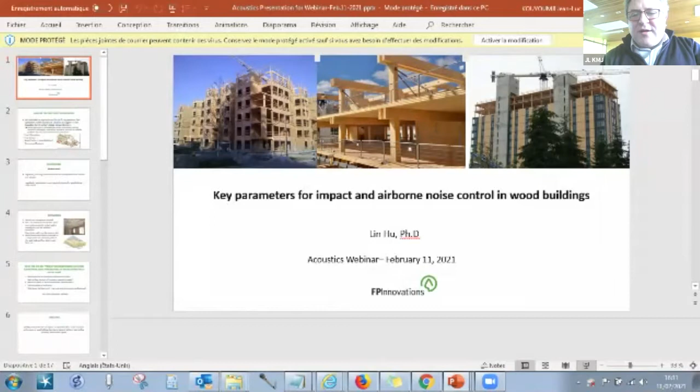Okay, there's a noise. The noise. Very much noise. Yeah, you can start, Lin. Jean-Luc, you can ask everyone to put their mic on mute just in case. Okay, okay, you can start, Lin. We can hear you, okay.

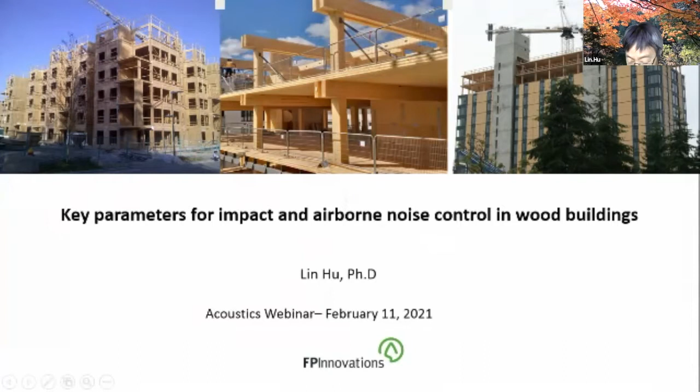Thank you, Jean-Luc, for the nice introduction. Hi everyone, I'm going to share some of our findings from a preliminary study on some key parameters, other than mass, of the insulation material and the components of wood wall and floor assembly, to control noise transmission in wood buildings. We found those parameters have often been ignored in producers' specifications, in our theoretical work modeling and our design. Sometimes people - designers and producers - call us asking what parameter properties we should produce, or what insulation material we should select to build better insulation, better components, or a better assembly.

So this is my purpose for this presentation. We'd like to call attention from the acoustic research community to pay attention to the fundamentals of wood construction noise control.

The fundamental is what I call the constitutive equation: how the material and component acoustic properties correlate to the wall and floor assembly's total sound insulation performance. So this is our focus.

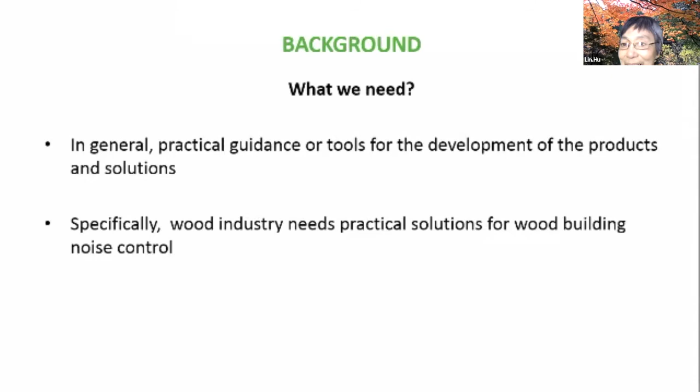However, we also found noise control for wood construction is a challenge, not so simple. So far, according to my knowledge, which may be limited, I found that the theory and equations that work for a homogeneous plate, like a concrete slab, don't really work for wood, because wood has a lightweight nature. We found mass law alone doesn't work.

Secondly, even mass timber, which is very close to a concrete slab, is not homogeneous. So those theories still don't work for the mass timber slab.

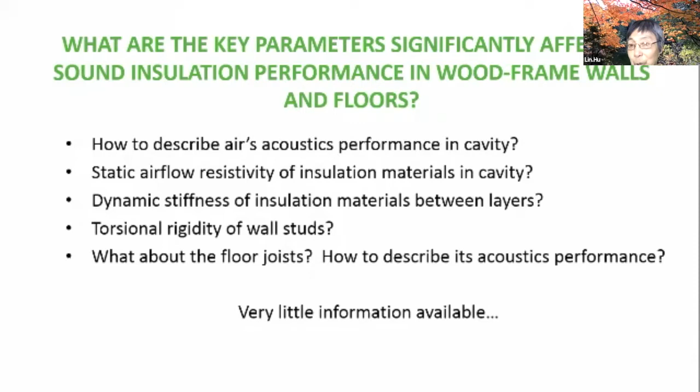For me, this is just one sentence I can find in the literature. No data, but it's so true. This is what we found: torsional rigidity, how the wall stud torsional rigidity affects the wall sound insulation performance. We understand the stud and joist play a role in the floor and the wall system. For me, it's just like a sound bridge, very similar to a thermal bridge.

Then we need to develop criteria. At what value of torsional rigidity is that bridge totally connected to the gypsum board, with no insulation function at all? All of these questions lead us to this study, but it's just the first step. We just started establishing our material laboratory. Our objective, I call it a preliminary study, is to identify the key parameters and how they affect the sound insulation performance of wood buildings, focusing on dynamic stiffness, static airflow resistivity, and torsional rigidity.

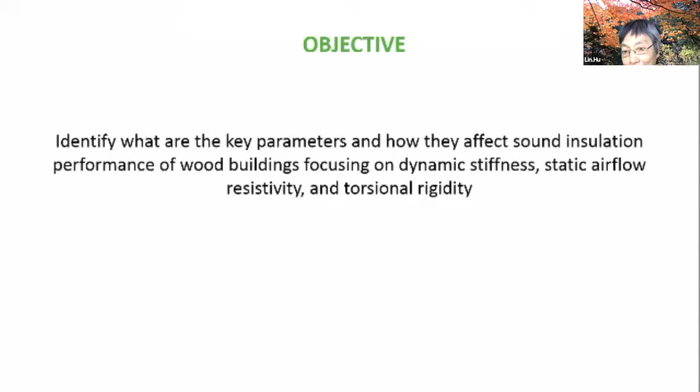This is simply to screen various combinations of flooring, finish, underlayment and topping, to see what role the dynamic stiffness plays, and it's very cheap and easy to do. It's not very accurate, but if we do everything in the same facility with the same approach, we can compare apples to apples. We call it the screening study. Okay, now let's move to the second one.

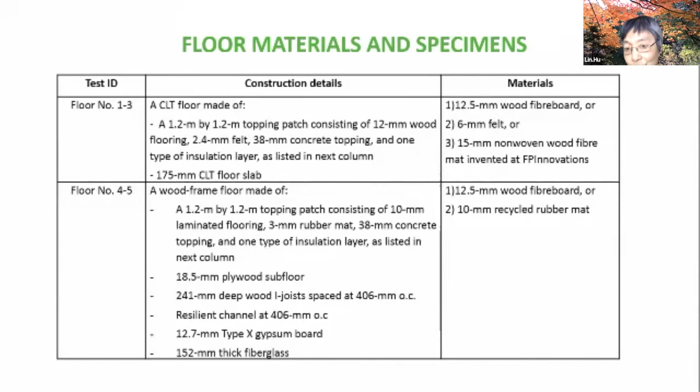So next one is, oh, sorry, too fast. Let's just go back one slide. Okay, now we built several walls. Here I also just show you two types of wall for two purposes.

The one is a box, very simple. Just the four edges, then on the top and the bottom just a very thin HDF plate. The purpose of this box: we just change all the filling inside, the sound absorption material in the cavity of the box. We try to see how the airflow resistivity affects this box's airborne sound insulation.

Actually we did more filling materials, absorption materials for the cavity, but I just show you these three significant ones. The one is fiberglass, everyone knows it's very common for every country. Then also rock wool. Then we also used wood fiber board, but maybe nobody really uses wood fiber board. Then you will see some interesting results.

Then we also have the real wall, wood frame, wood stud wall. So the wall group number 4 to 7, actually more than that, we did more than 10. However, for this wall, we only change the stud. We can't get all kinds of studs with various torsional rigidity in the market. So we asked our colleague to develop all kinds of wood-based stud. We call it the composite stud, with various torsional rigidity, to help us do the study.

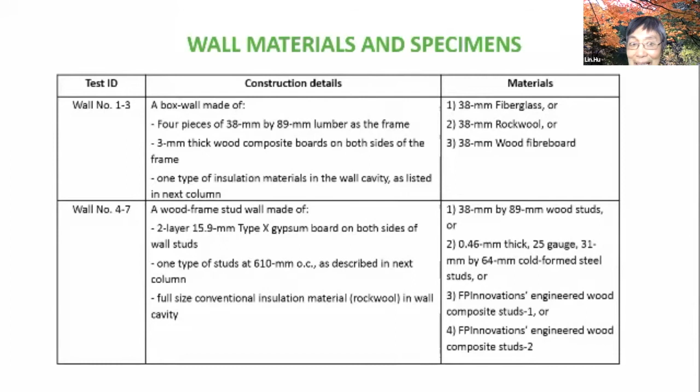So, okay, now very quick, now we just see the results. So the method, just a very conventional method. But we use ASTM, not ISO. But some ASTM are very similar to ISO. So let me quickly show you results. Okay, next, results.

Okay, the results, obviously for dynamic stiffness, because we measured not in the acoustic chamber, actually in the mock-up, so we measure the apparent impact insulation class, AIIC. So obviously you see the correlation. Once you have the lower dynamic stiffness, we got a very high AIIC. This trend applies to both mass timber floor and light frame floor.

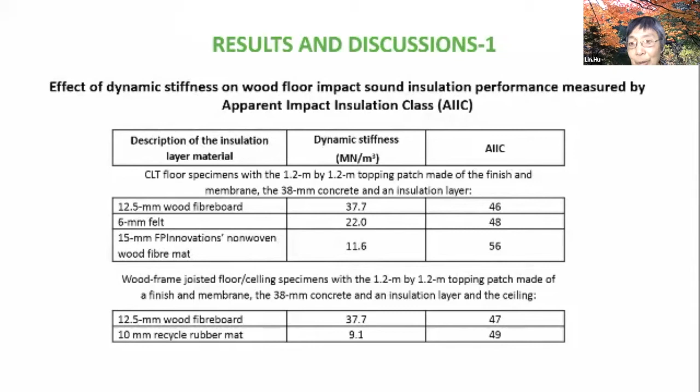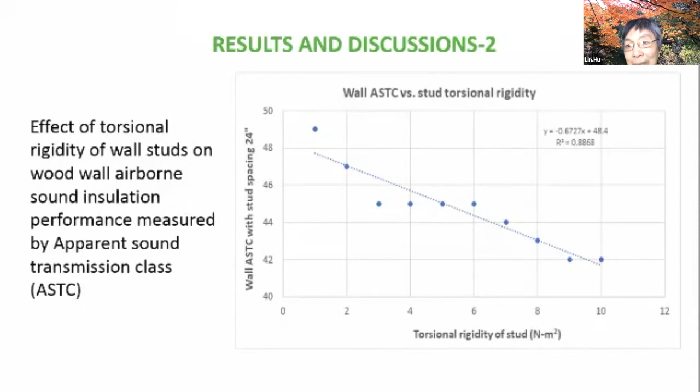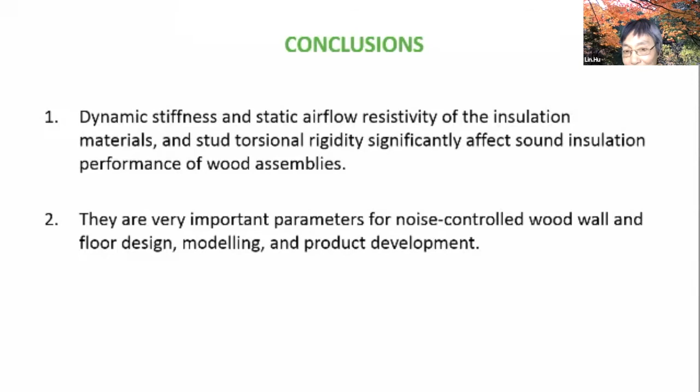Last one, I really thank the wood industry, the Canadian government, and our colleagues for supporting this study financially, mentally, technically. Okay, so last one, the next step.

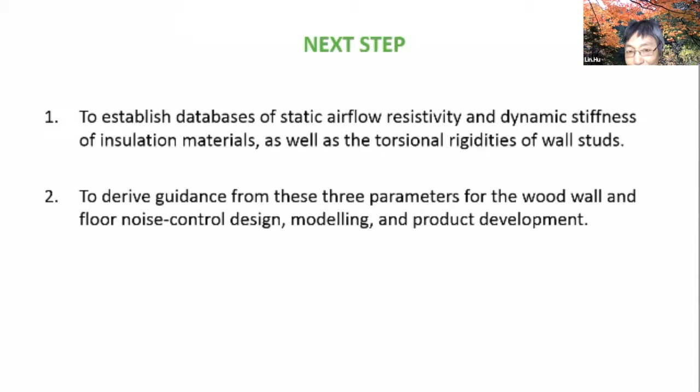Because we are just at the beginning. Then we try to establish our material laboratory with equipment to measure more torsional rigidity, and measure more dynamic stiffness, even the impact force. We are going to buy a force plate, we will buy an airflow resistance meter, we will measure more, we will try to see more correlation at this moment before we can get theoretical understanding. At least we try to establish some empirical correlation equation.

Okay, so the problem concerning the impact noise is that we need to improve the occupants' acoustic comfort for lightweight floors. And in the last housing certification by Qualitel, CERQUAL, we are imposing a new impact noise requirement, and the L'nT,w and L'nT,w plus CI 50-2500 has to be below 55 dB. Maybe I should add that for the French standard regulation, we only have a requirement on L'nT,w, and it has to be below 58 dB.

So the question was, how do we reach this performance, especially regarding the low frequency aspect with the adaptation terms dealing with the low frequency. So if we look at the performance of the floor, we decided to look for floors that had a performance between 50 to 52 dB in terms of Ln,w and Ln,w plus CI 50-2500. Oops.

And one of the potential solutions that we thought about was adding a weighting layer to the floors that we usually deal with. So in this presentation, we will have different types of wood floors. The first one would be a wood frame, I would say standard floor. The other one is today more common, it's a CLT floor. And then the last one, which is Jean-Luc's investigation, concerns a box type floor.

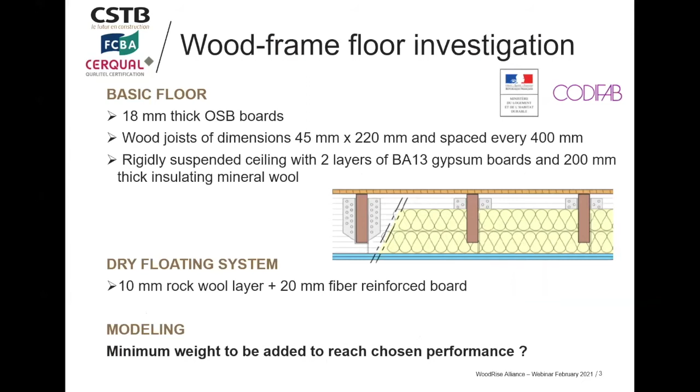Okay, we're trying to develop something which is all dry. No pouring concrete or anything like this in these solutions. So we decided to use a modeling approach to try to find the minimum weight we needed to add to this system in order to reach a chosen impact noise performance. So in this work, we used an optimization model, which is based on a genetic algorithm. Such algorithms are based on the notion of natural selection applied to a population of potential solutions to a given problem.

Hello, somebody's talking at the same time? Please. Thank you. Oops.

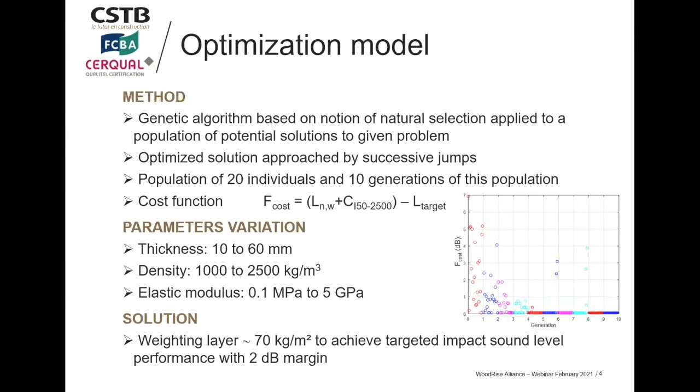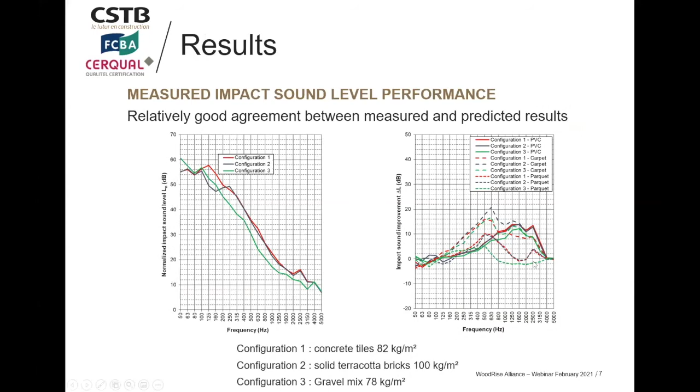On the right-hand side, you can see the impact sound improvement related to the different floor finishings that we put on the system. One has to be careful because the performance of these floor finishings is different as a function of the system we tested. So we cannot generalize the performance of the floor finishing. For example, the parquet on the floor configuration using the gravel mix is really low in the high frequency range. It's even below 0.

So next we'll go to the CLT floors investigation.

I don't know if Nicola is here and wants to take the lead on the talk, or if he wants me to keep going. No, just go ahead, Cathy. Okay.

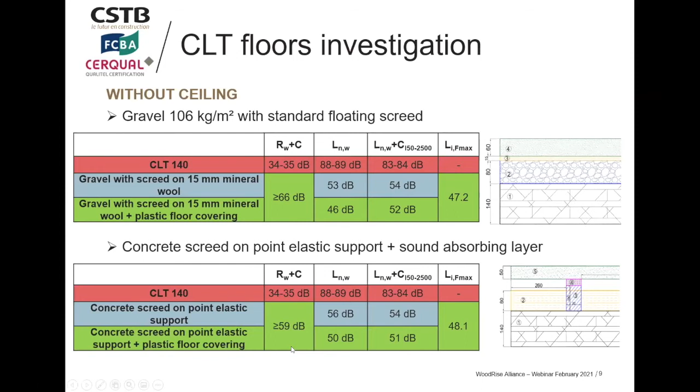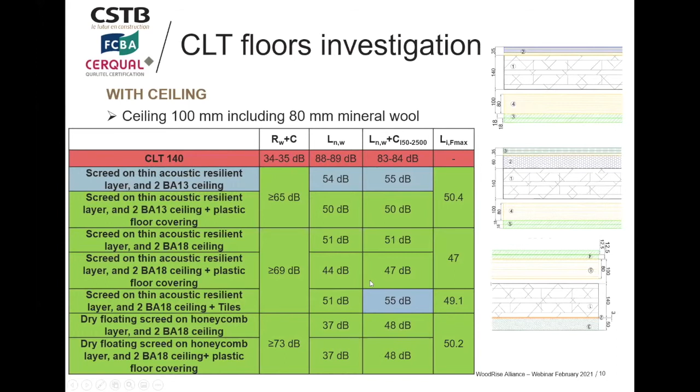So for the CLT floor investigation, we have a low frequency effect observed in relation with the floor finishing, or the floor covering. And we did not expect this because usually we try to find a solution without the floor covering, and we say the solution is fine for all floor coverings. So we have to be really careful with this floor finishing.

The plastic floor covering finishing implemented was associated with a low frequency improvement when we mounted it on the standard screed, and with a low frequency deterioration when it was mounted on the dry screed. Okay, for the tiles, we had a low frequency deterioration, and that's why we didn't meet the requirements when we used tiles on such floors.

Another remark regarding this investigation was that the weighting layer, when we used the gravel mix, did meet the requirements in terms of performance. However, when we used a mortar-based weighting layer, which is a bonded system, we didn't meet the requirements. So one has to think about this solution, and whether to use an unbonded granular material rather than a mortar-based screed for the weighting layer.

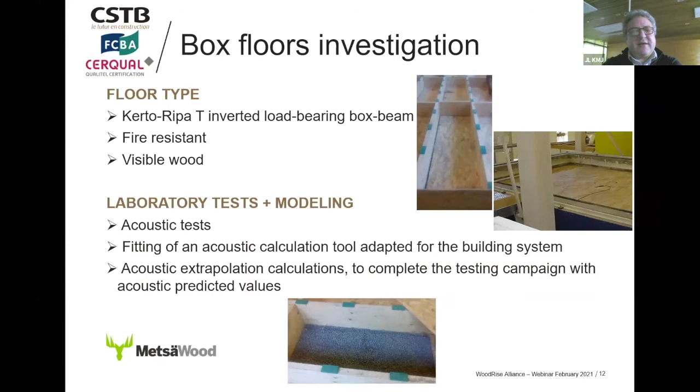So this is some results coming from tests we did with the same building system. Again, this development was done together with Metsä Wood, and the target of this company was to create a very high level performance floor with a big cavity using less wood. They are using LVL, and their market target is something like 8 to 12 meters of span, or 6 to 14. So we tested some different configurations, inspired more or less by the Belgian bunker floor.

Thank you, Belgian people. This was during the Woodrise Congress in 2017, where Bart Ingelaere presented some results, and Metsä Wood said, 'Oh, this is very interesting, why don't we also use this system?' Okay, so the building system is a...

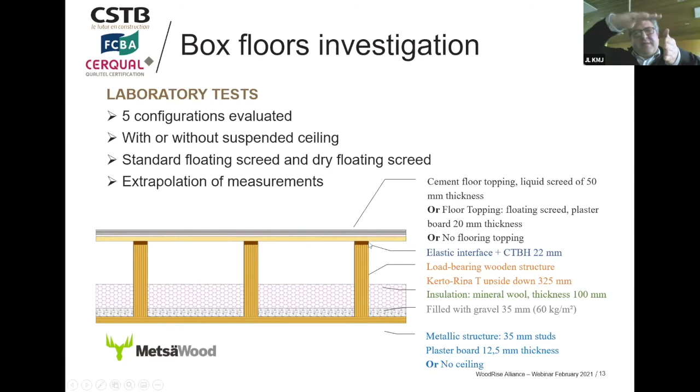...reversed floor, and the studs are on top, and inside the cavity it's filled with a little bit of gravel. On top of it you have insulation material, and then on the beams that are on top, you put a panel, and in between that panel and the beams you have to put some elastic layers. Very interesting system in that case. And on top of this, you can put a cement floor topping. So maybe we can go directly to the measurements.

A very interesting thing we identified, but this was not actually our purpose - the results were strange, so we said, 'Where is this coming from?' And then we noticed there was a screw inside the floor. The people, when they prepared the floor, just put a screw because they couldn't imagine that you cannot put a screw on top of a panel. The structural behavior of the floor is taken by the bottom part of the panel, the bottom top of the box, and actually the system is fire resistant also, so we don't need that screw.

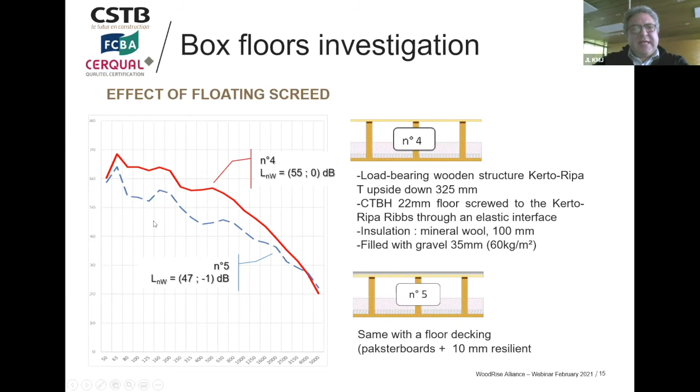But anyhow, it was there, and look how much we can gain from that result - it's something like 10 decibels. I see that we don't have the low frequency results for this, but never mind, we have it and can calculate it. When we put a lightweight floating screed on top of this floor, we are very good in low frequency behavior and also in impact noise.

If you can show the next slides - we made some measurements to create a model to calculate and derive calculated results from measured results. We are showing here the curve of this calculation. So when you add a ceiling on such a system, you also enhance the performance of the floor, but not that much. And if you use the cement screed, of course, you enhance the performance further. This has been done using calculation.

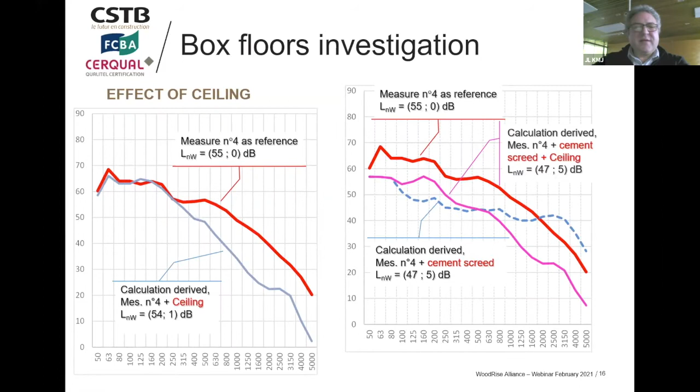Is there any conclusion on that work? Yeah, just a general conclusion - looking at different types of wood floors, we have different solutions targeted at performance that integrate the low frequency range with respect to impact noise. We used a mix of laboratory tests and modeling approaches, which allowed us to optimize and evaluate performance before testing in the laboratories. The weighting layer appears appropriate, but one has to be careful about the type of material used as weighting layer, especially as we've seen on the CLT floor. Care must also be taken regarding the floor finishing effect. That's all for today.

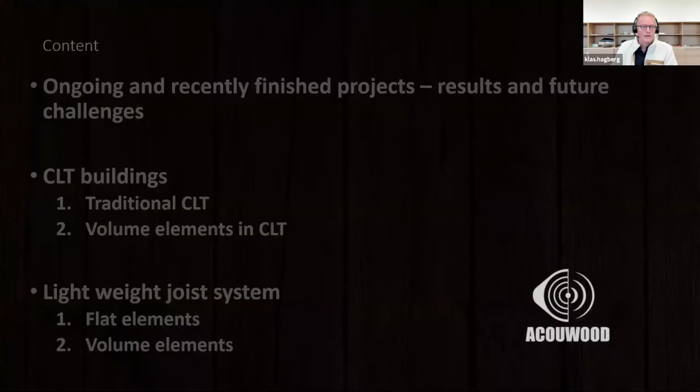The content of today: ongoing and recently finished projects, results and future challenges. I will go through some CLT buildings with what I call traditional CLT - maybe it's not really traditional, but it's more like plates that you put together. And at least in Sweden now, it started to be very hot with volume elements in CLT, prefabricated in factories. We also have lightweight joist systems, flat elements and volume elements. I will not talk too much about volume elements, but we are involved in some projects with volume elements with joist systems also - I have limited time, so I think I will stop there.

I think it was quite interesting to hear Lin Hu before, because with this problem of predicting sound insulation, I think we need to understand much more still to predict - we are a little bit working in the blind. So you have to be a little bit stupid to do this.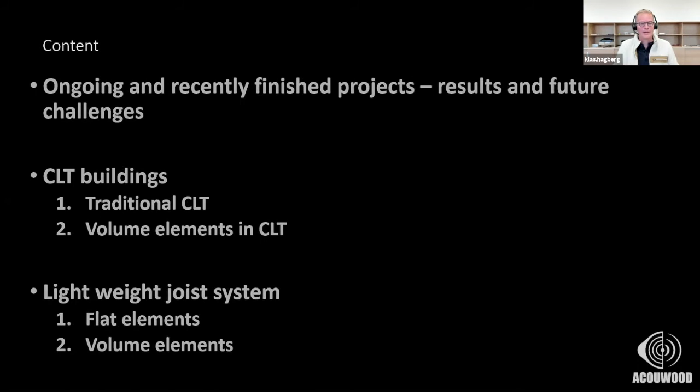This is a summary of the projects I will show you today.

This one is one of the biggest projects we have for the moment. I have been working with it for approximately 4 years. It's in the city center of Stockholm - 13 stories of wood in CLT, 4 buildings, approximately the same. It's called Cederhusen.

The second one is volume elements in CLT in Nyköping, close to Stockholm also. They're not all finished, but the main part of these are finished and already moved in, so we have seen how it's working in reality. I will come back to that.

This house is in Karlskrona, south of Sweden - it's a quite fancy place and very nice project. Then we have student dwellings in Örebro, some I-joist systems in Skellefteå in the north of Sweden, and an 8-story building in wood joist system in Enköping, a little bit east of Stockholm.

If I continue now, the first project I want to show you is this Cederhusen. The first house out of 4 is now built - they haven't moved in yet. We are doing regular controls in this building, and it's fully in CLT.

There is some concrete on top here, as you see on the floor structure. But all the stabilizing elements, the elevator shaft, and everything is in wood, CLT elements, nothing else. So it's quite a lot of potential flanking transmission paths and so on.

It was quite rough requirements to really keep a lot of - don't make it too thick, as they say - because we need to have enough space to rent out. You can always improve by adding layers on the side of the CLT panels and reduce the flanking transmission, for example.

But the final solution in this project was to have a concrete slab on top, or rather a CLT slab as a bearing element. They vary from 160 CLT up to 220, depending on the load and the span and so on. Then there is 30 millimeters of impact sound board, then we have 80 millimeters of concrete with floor heating, and then parquet on top.

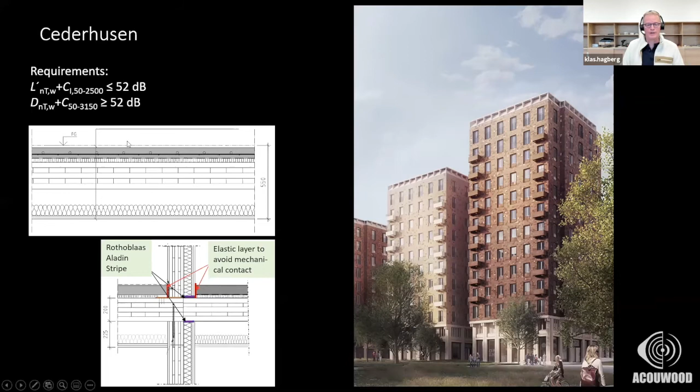And I will show you some initial results. This is from inside the building. At an early stage we told them they have to build a test room, which they did, not with the real concrete in this case, it was plates, 80 millimeter thick, on top of an impact board, and then floor covering. They made a ceiling in the floor below also. And we took the worst case scenario with 4 flanking walls in the room, not covered with any gypsum or anything yet, just to be sure we were on the safe side.

The results from this test measurement was impact sound 44 dB, super good, better than expected actually, better than predicted also. Airborne sound was more or less like predicted, 53 dB, a little bit better actually. I was thinking with this thin layer and with the wooden, visible wood, it would have been a little bit worse.

This here is the result from airborne sound. The different colors here, the red one is the measurement results, the gray one is predicted. We adapted the model after the measurements also to make sure we're on the right track, to be able to calculate more rooms and other configurations. This yellow one is the transmission calculated with only the floor structure. So almost, if this is true, almost everything is going through the floor structure.

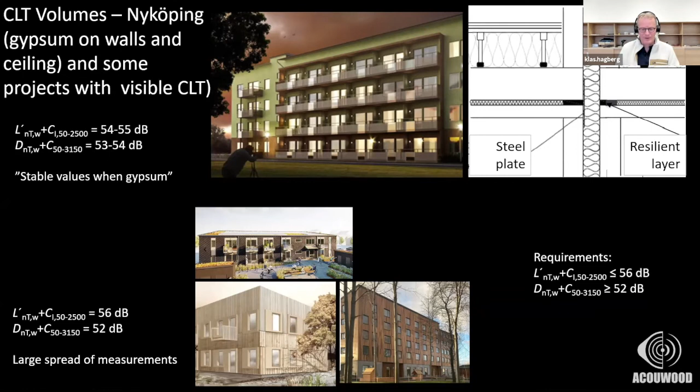And by using this, we didn't need any Sylodyn or Sylomer or whatever between the different stories, since we have this covering to reduce the flanking transmission in both ways. However, in the facade, there was not visible CLT because there was one gypsum mounted directly on the wall here. But still no other layer to reduce the sound emission from the walls.

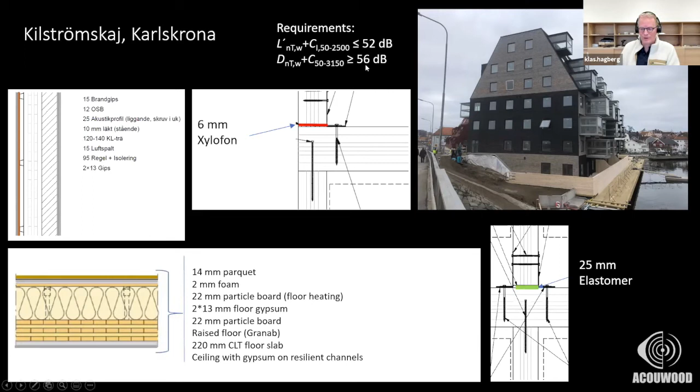Requirements were to fulfill sound class B, 52 dB for impact sound and 56 dB for airborne sound. And we did quite a lot of testing, and we managed, but there were a few exceptions here actually. For example, here 58 minus 7. It's a little bit too bad. It's not even BBR. But it was a very small room, and small rooms are tricky to fulfill, no matter if it's concrete or wood or whatever.

But the mean value in all measurements did fulfill 56 dB. And in Sweden, it's okay to have 56 dB if the deviation in single measurements is not bigger than 2 dB. And impact sound, sorry, we had a mean value of 52. It sounds almost like I'm lying because it's just spot on, but it's true. Yet again, we were spot on here.

And I'll show another example of a project, Sjöstadsorangeriet. It's exactly the same build-up. The only difference between Sjöstadsorangeriet and Kilströmskaj in Karlskrona is that we had a floating gypsum on top of the Granab floor, and we were thinking it would be the same, but the result was actually a little bit worse. We fulfilled BBR, the minimum requirements in Sweden, but not sound class B for impact sound. Airborne sound was no problem.

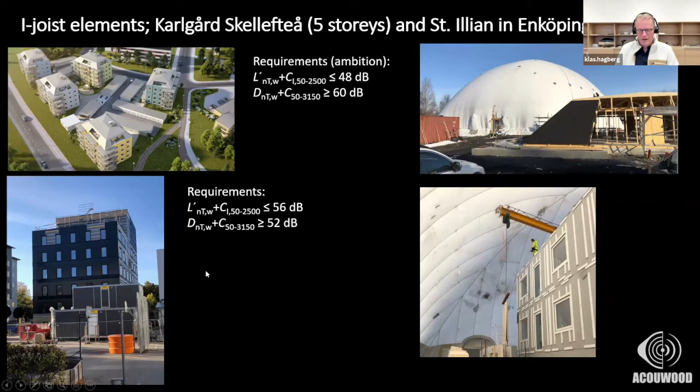And they actually fulfilled sound class A, 43 dB, with a very light structure for the floor. And the key here is to use... I'll just move my bar a little here again.

They're using I-joists here in the floor structure, and then there is a stiffener I-joist also in the other direction to make the floor much stiffer, and they are connected by a beam under. And then there is an LVL board here, glued and screwed together with the beams, to make it even stiffer. And then there is a floor heating board here, and then parquet on top, nothing else.

And to make it possible to transport these elements from the factory to the building site, they use a steel spring in the ceiling. When it's transported lying, it's just lying directly together. And when you lift it up, the spring starts and the ceiling falls down. And everything is prefabricated, even the installations, and everything is designed first in the 3D model. And they just plug it together on site.

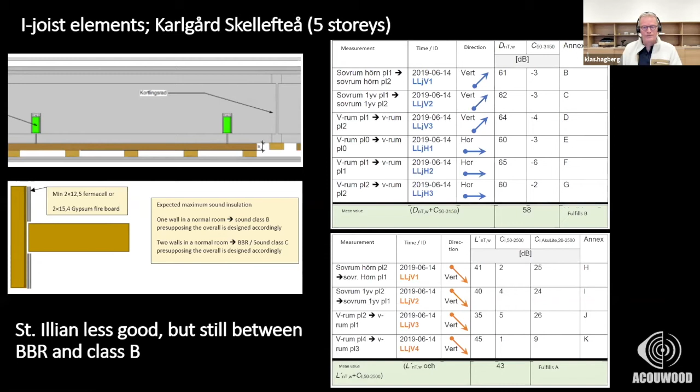Conclusions. I hope I am in time. First of all, I think elastomers and their effect on flanking transmission and stability need to be further evaluated. It's a very high cost in projects, and if you just gain 1 or 2 dB, maybe you can reduce the requirements instead a little bit. I don't say I know it's true, but we have to know more about this.

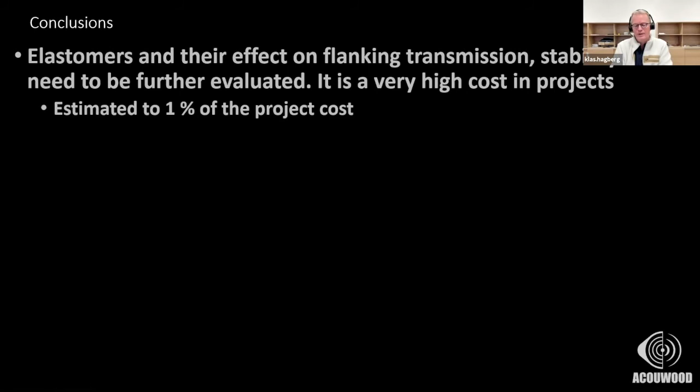And high cost: I had an estimate from the people working in Cederhusen. They said around 1% of the total project cost, and it doesn't sound much, but if it's a project cost of 200 million Swedish, which is 20 million euro, it's like 200,000 euro just for the elastomer to put it in place. So if we can do something about that, I think they will be super happy.

CLT volumes with visible wood are tricky to predict. It's really not easy, I would say. And the higher the building, the worse it becomes. We're working on three eight-story buildings with CLT modules now, so it will be interesting to see how we can connect these different modules to make it feel good.

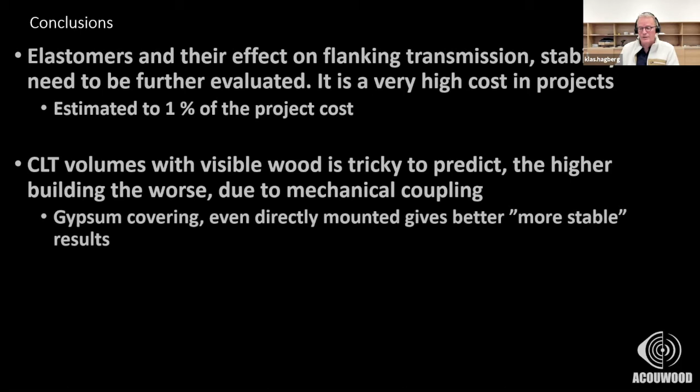Gypsum covering, even if directly mounted, gives better and more stable results. You don't get as much spread in the results as if you have visible CLT. And I would say it's possible to achieve very high sound insulation with I-joists. And it's also a good system to really reduce the amount of wood, or rather you use the wood in a better way, because it's a more efficient way to use wood. You reduce the amount of wood, which could be good if you really want to build a lot.

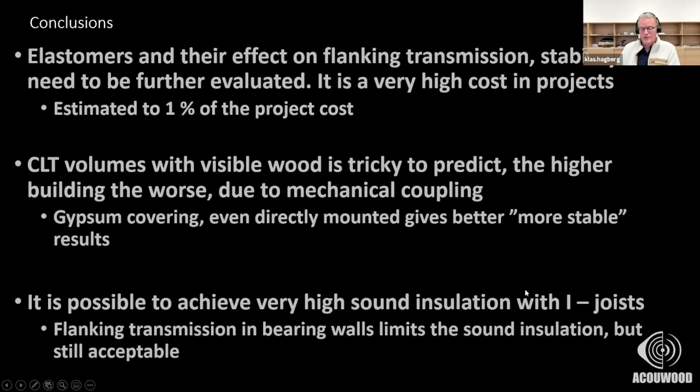And flanking transmission in bearing walls limits the sound insulation, but it's still acceptable. So I don't think it's a big problem. And I think that was what I wanted to say. Thank you.

Thank you very much, Klas. Yes, you were ahead of time. I mean, you are five minutes late, but it's okay. Yeah, you accept it. Yeah, it's okay. Okay.

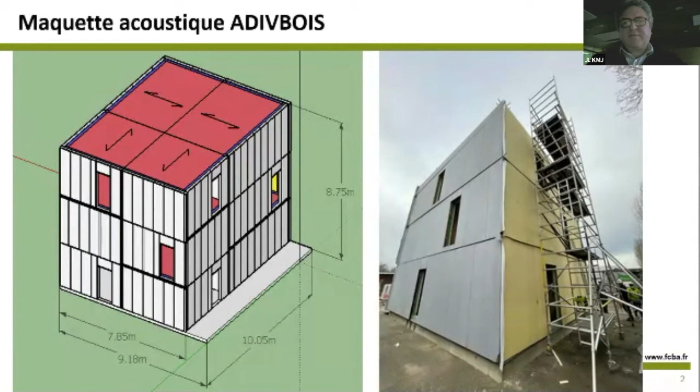Okay, so this is the mock-up, or the maquette. This mock-up is made of 3 floors of CLT and also walls made of CLT, and all surrounded with stud walls, say, framed walls, facade. So here you have the picture of how it was last week.

So we started this in November 2020, and it started, of course, with concrete. The soil here is very weak, so we had to make some pillars, and we built up a very simple concrete structure. On top of it, we prepared our maquette, our build-up. Here you can see the first part of the building where you can see the horizontal cross junction that we're going to analyze, of course. And here we are.

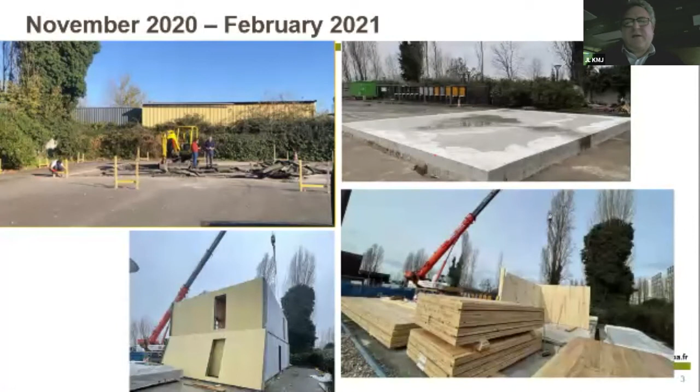It goes very quick, actually. Once the wood started being implemented, it only took something like 7 days. So this was very quick, and here you can see some pictures from last week. You can see sun in the window here, but it's false information, huh? Because while we were implementing this building, it was raining all the time. So that's why the wood has really been in contact with water, and why we now need to wait a little bit.

Yeah, we can see that in Sweden you are using tents, but this is not at all something usual in France. So we are not using tents, as you can see.

So our building, our maquette, I will say it in French because it's the name we gave it, is going to be used for flanking transmission measurements on junctions. And of course, our junctions vary across different parts of the structure. So we are going to make the flanking transmission measurement on the naked structure. That means that only CLT is going to be measured here.

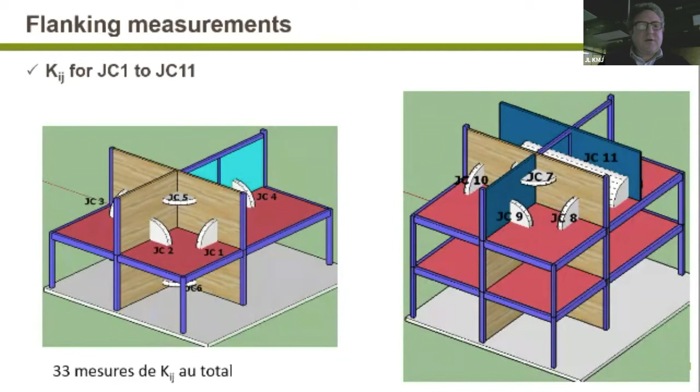Bare CLT connected with other parts of CLT, and also bare CLT connected with plasterboard walls, and facade. Also, we are going to make some facade. It was also the occasion to go a little deeper into our knowledge. That's why we also changed the plan of experiment a little, and we added some things to identify.

And here we are going to identify the point connection. So what we asked the designer is to leave us a system with the capacity of changing the point connection. So here where you see the dotted lines, we are going to change the connection between the floor and the structure.

Okay, so we are going to start with actually no screws, then a screw every 500 millimeters, and then screws as it should be, every 250 millimeters. So 3 steps of point connection, and this is to identify the performance for 2 things. One is point connection knowledge, point connection modeling, and also the point connection together with resilient layers.

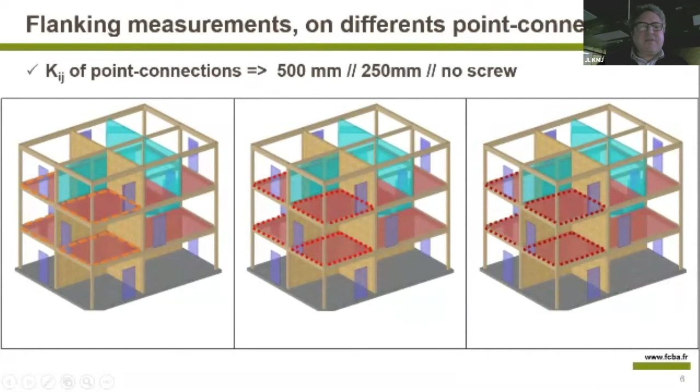Here you can see the resilient layer. But first, let's talk about the envelope. The envelope is a facade. The facade is not a structural bearing system. It's only a facade that is hung on the structure. The structure is the blue lines here. It's the poles and beams that are making the structure holding the construction.

And of course, the CLT in the cross here, cross in the first floor, half cross here, and only one panel on the last level. So the building system, I was saying that it is different from one part to the other of the construction. First floor is with resilient layer. Here you can see them. It's the red line. Okay, and on the second floor, it's the same building system without this resilient layer. So this will help us to better understand what is the influence of this material, of course.

And then here we have on the edges, you can see the structure holding the floor. It's a pole and beam structure, and the facade that is only making the box all around it. Of course, it's going to be doubled with plasterboards, and this is going to be done in the near future. It's going to start in two weeks. So today the structure is completely finished, and it is ready to follow up, but we cannot close it because it was a little too humid.

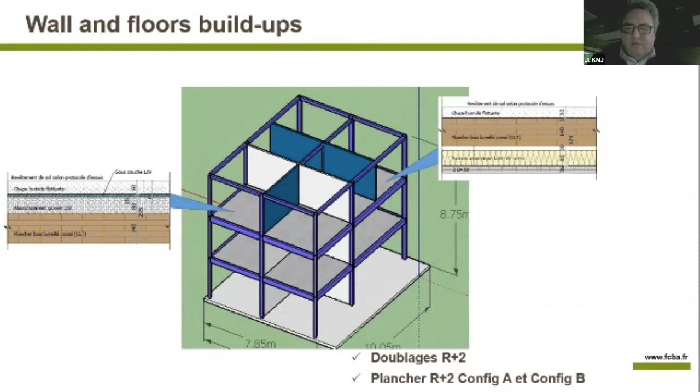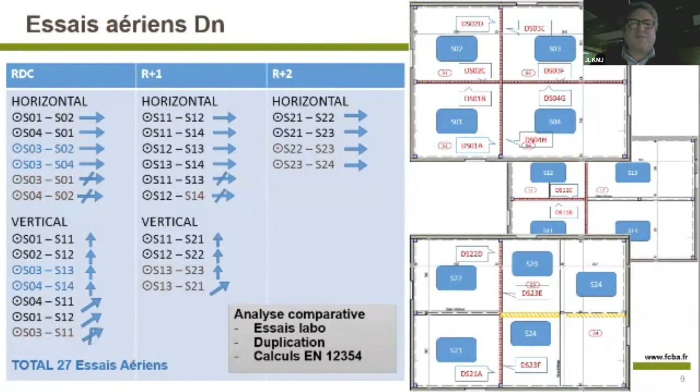And so one part is with insulation from the top, and the other part is a more usual building system with CLT floor, 140 mm, with a floating cement screed on top of it, and a suspended ceiling underneath with 180 millimeter gap. So after we build up everything, we're going to make a huge quantity of testing. After flanking transmission, we're going to make all possible tests in all directions for airborne noise, from one room to the other, from top to bottom, and also diagonal, of course. And this we are going to do for airborne and also impact noise.

And after we make this first investigation on the building system that we believe is going to work on this structure, we are going to change the build-ups. So we are going to work on walls with visible wood and make all kinds of permutations inside the building system. Altogether, we're going to perform something like 40 tests for impact, more than 50 maybe, and for junctions, we're going to measure something like 16 kinds of junction in Kij. So it's a laboratory for testing and measuring the Kij and also validating the complete system. It's an in situ measurement laboratory that is controlled. So it's a laboratory, but in situ.

Okay, so to have an idea of what we're measuring, just look a little bit at how much time I still have. Not much.

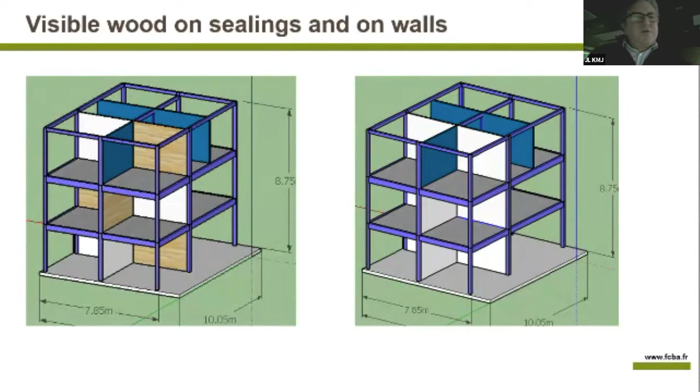So I'm going to run through a study that I prepared together with Woodrise. This was a few years ago. We worked together with people from Tecnalia on that. So we measured some flanking transmission. We don't have much information about flanking transmission with CLT, and this is part of what I have, and I am of course very interested if anybody can help in sharing the information they have on flanking transmission. So we did some flanking transmission. This was five years ago. It was presented at Internoise in 2018, I think, yes.

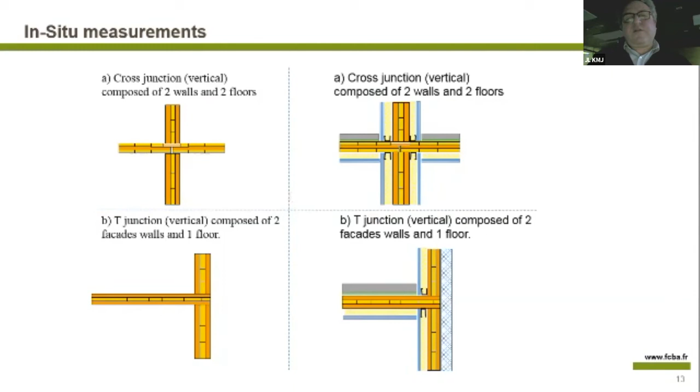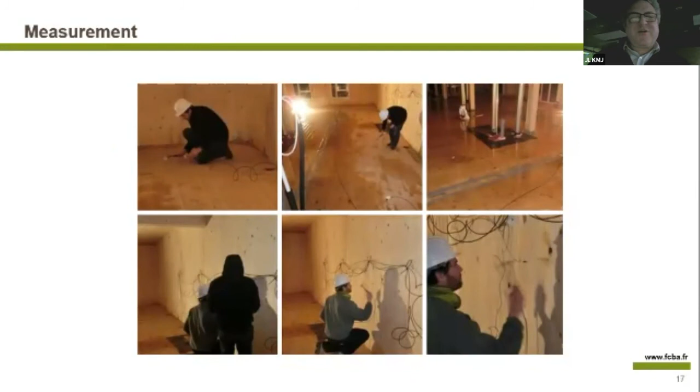And so we worked on different measurements, and we worked on in situ measurement. In situ, you have to do everything in one night, actually, because during the day the people are working on the site, and they will not wait for you to make some measurements. So we worked on bare CLT, and also on facade and cross junction with doubling, with all the structure and even the plasterboard. So this is how it looks, and this is how we measure. See, again, a lot of water.

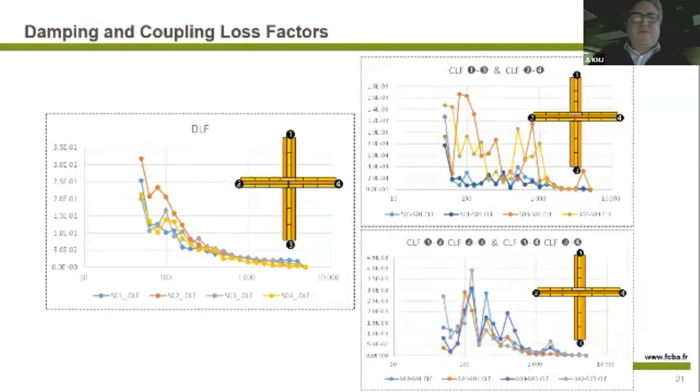This is exploitation of measurements. It's a lot of measurement, of course, and exploitation. And here are some measurements of coupling and damping. And this is physical measurement that we can use to calculate the Kij, that is the facteur de réduction vibratoire, vibration reduction factor, something like that.

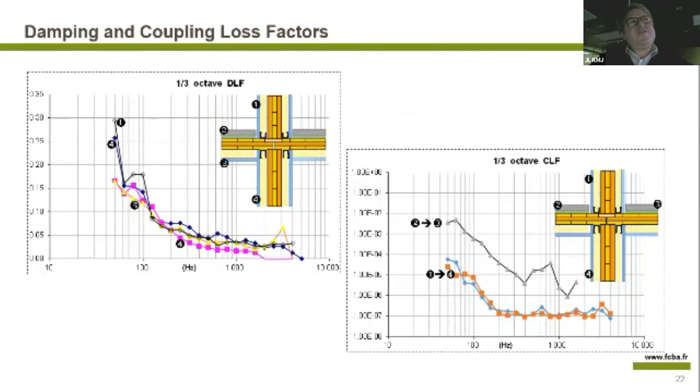Okay, so here are some results on bare CLT. This is what I have. I have maybe one or more building systems, because during that project we measured some flanking on different structures, and you can see here some results. This has also been measured on CLT with different thicknesses. This was very interesting also to see what is the difference and so on.

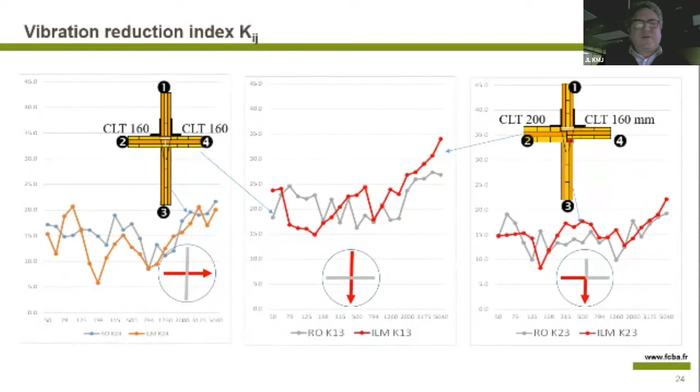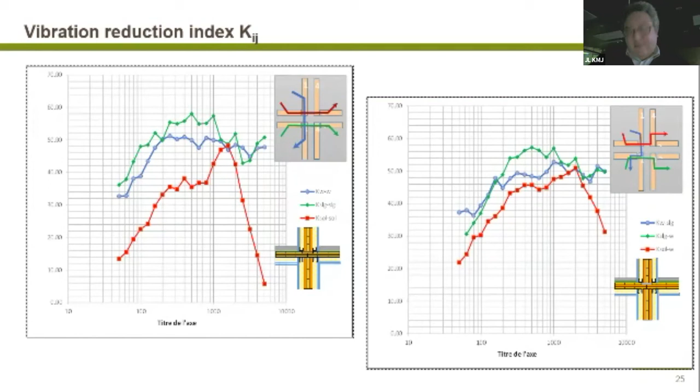And we did that also with walls that already have their own linings. So here, if you are talking about flanking transmission, the level of performance of a complete structure is very high. And actually what we noticed when we made the validation testing is that flanking is not that much influencing the results.

That's it. So now for our project, I'm going to show you the video of the full story of how we performed that work all together. If the machine wants me to do it, let me see here, maybe. So, let me see it.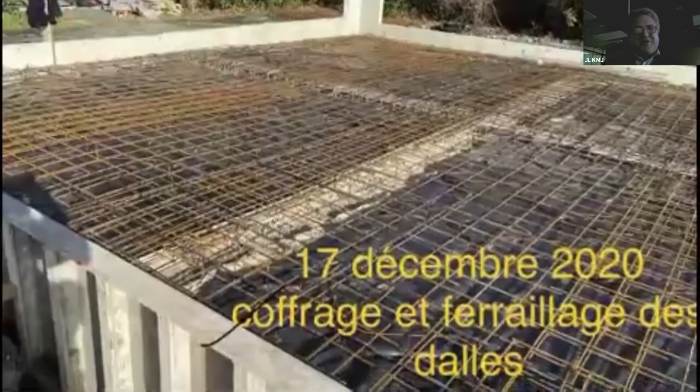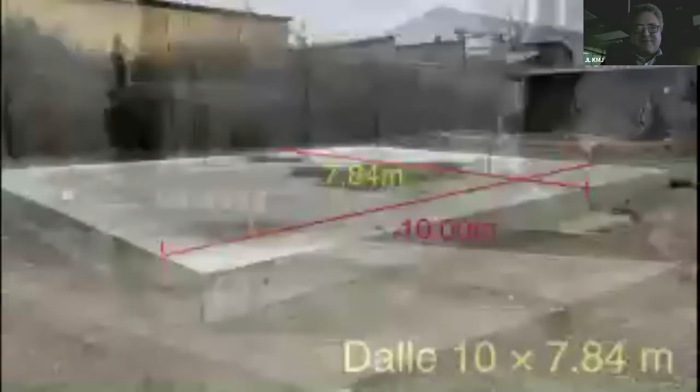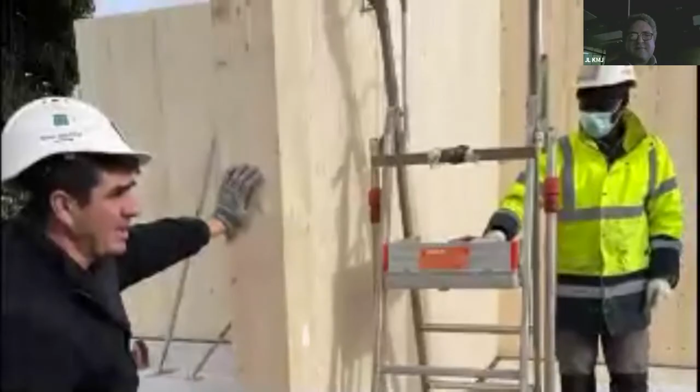Actually, it took so much time, this one, compared to the regular fabrication. It's 100 square meters per... Here you can see everything, and even downtown and so on.

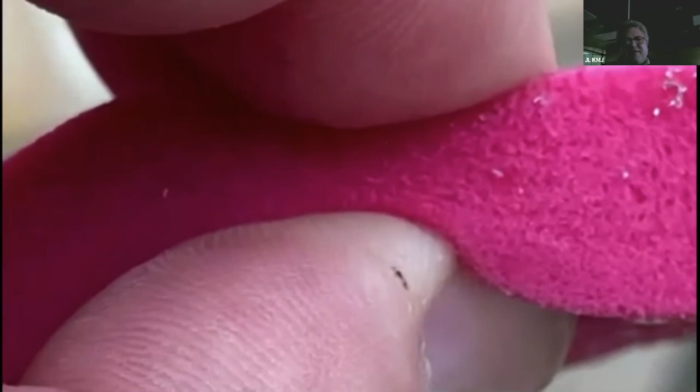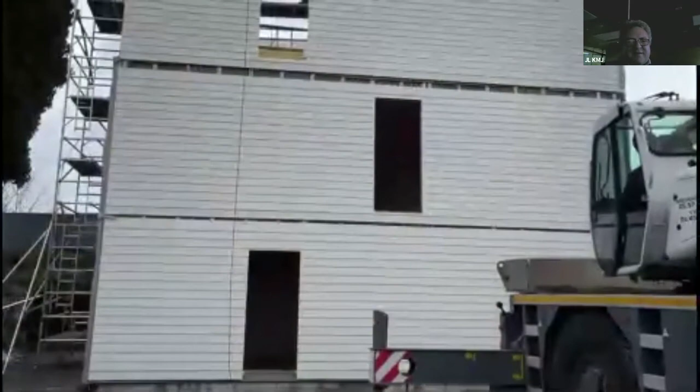Resilient layer for the floor. So now you can see it on the top. All junctions are not here. Now they're... so they had to change part of the panels that were broken and so on. So now they are nearly finished.

And, well, this is the boss. He's the owner of the company. He was there every day.

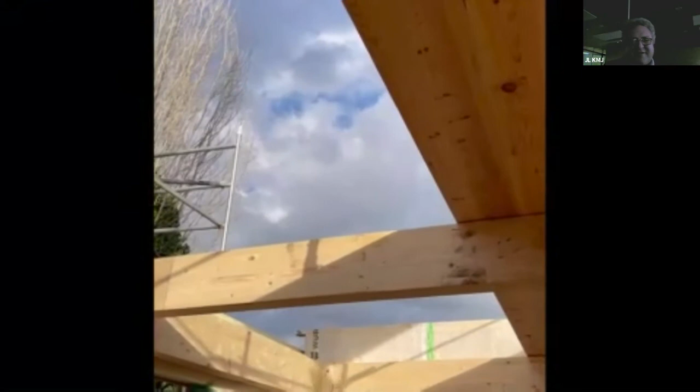Last floor implementation. We don't hear you very well, Jean-Luc. Oh. Speak louder, please. Yeah.

So this is the last floor implementation. This is a little bit accelerated, and the noise that you're going to hear is not the right noise. It's not the right noise. Implemented. This is the last.

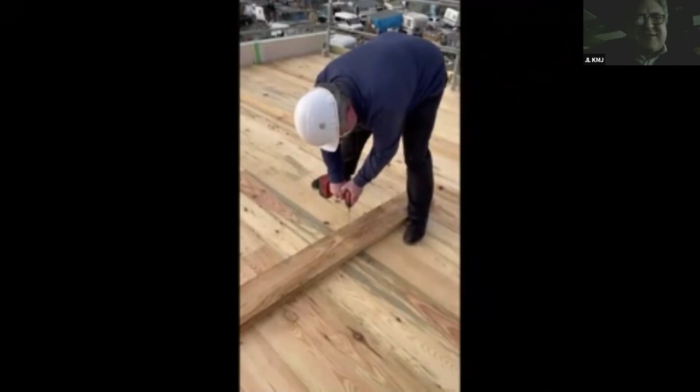I had the privilege to put it on the top of the building. Thank you very much. Of course, we all wear a hat and mask, of course. So this was last. Now we'll go back.

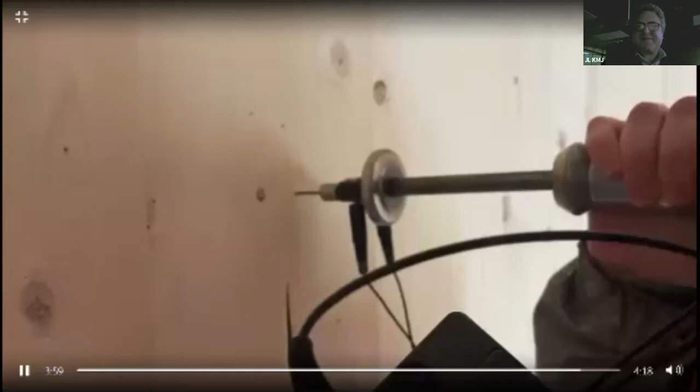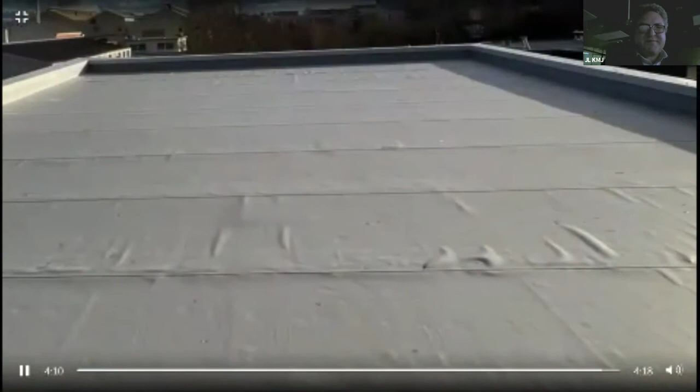Okay, thank you for your attention. Oh yeah, this is... and of course, they finished the sealing. Et voilà. That's it. Oh, now in a very dark ambience. I didn't notice. Yes.

So now it's time for everybody. We're still here, all around the table. Thank you for listening to us. Now I think it's time for us to answer your questions, or open the debate. Yeah, I have a question actually, unless somebody wants to ask a question very quickly. Well, there were questions during the presentation in the chat, so maybe we should go through these first. Okay. I cannot see it. Well, okay, so I'll check.

What were the properties of the resilient layers? That's for Klas. The properties of the resilient layer between the different modules, or were they different at each level? Yes, they are different on each level. It's adapted to the load, the quasi-permanent load. Okay.